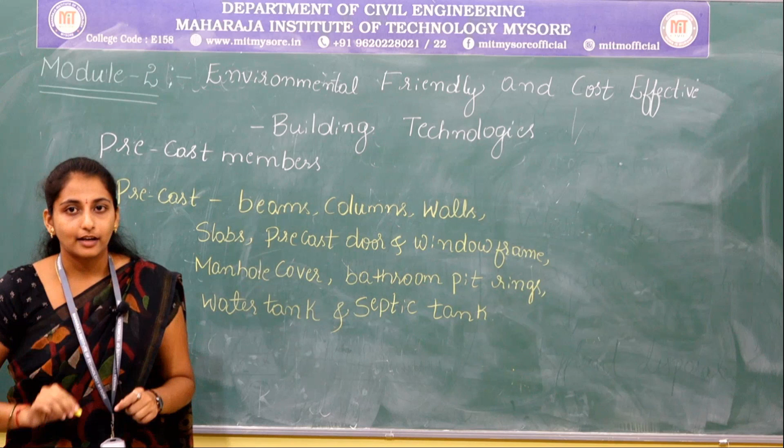In this particular session, I am going to discuss two precast members, that is precast water tank and precast septic tank. First one is precast water tank, and precast septic tank.

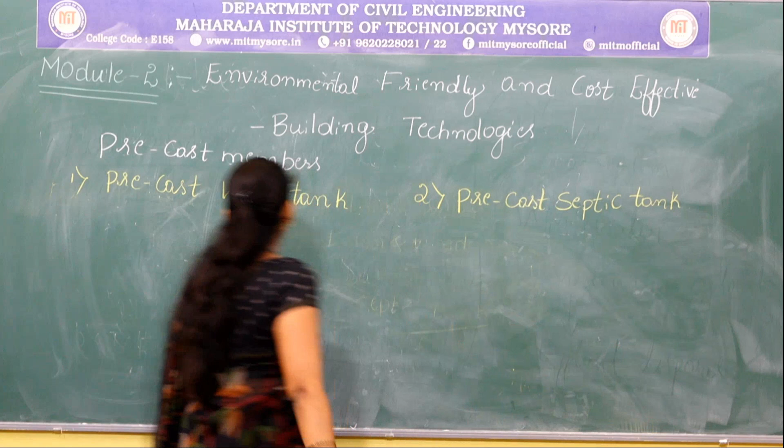Let us see what do you mean by water tank. As we all know, water tank is a container which is used to store water, either for domestic purpose, commercial purpose or for industrial purpose. Depending upon the water demand, we will use different types of water tanks. At present scenario, it is necessary to take measures to store and use water.

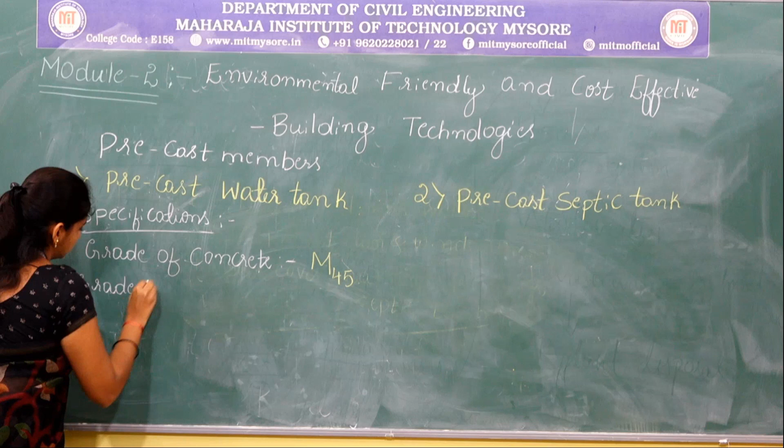Let us see what are all the specifications which are considered while casting the precast water tank. So some of the specifications are grade of concrete - the grade of concrete which is preferred for casting of precast water tank is M45 grade. Then the grade of steel which is used is Fe500 grade steel.

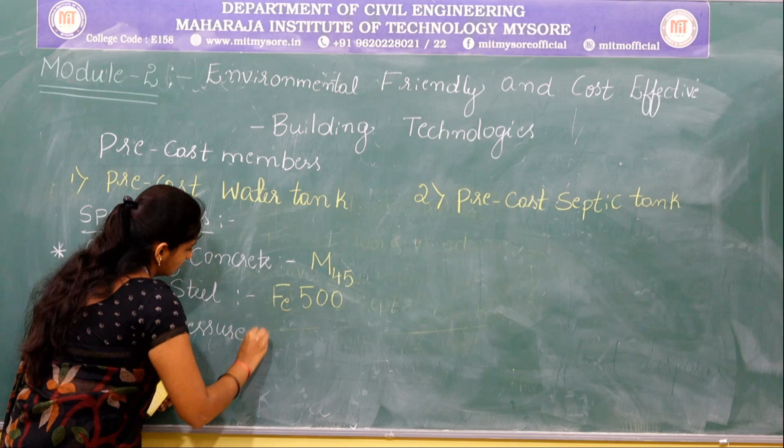Then another specification is earth pressure. So what do you mean by earth pressure? Earth pressure is the pressure which is exerted by the soil, called as earth pressure or lateral earth pressure.

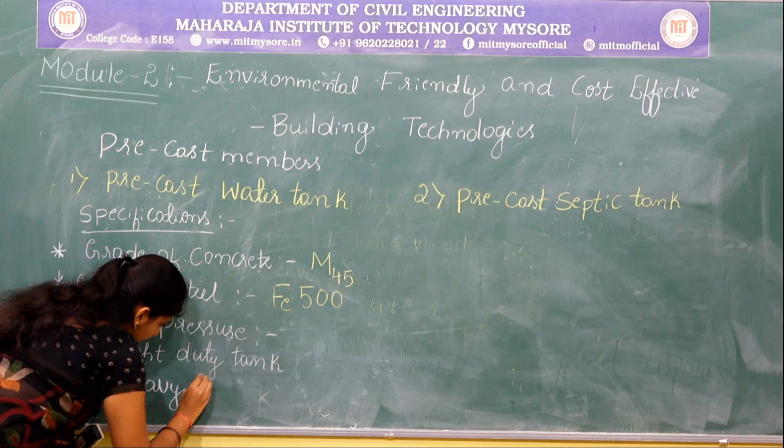Here there are two types of tanks, one is light duty tank, another one is heavy duty tank. The light duty tank is where the quantity of water stored will be less, and it can withstand or take the surcharge load of 1 ton. The surcharge load is the vertical load exerted by the soil, it can take up to 1 ton.

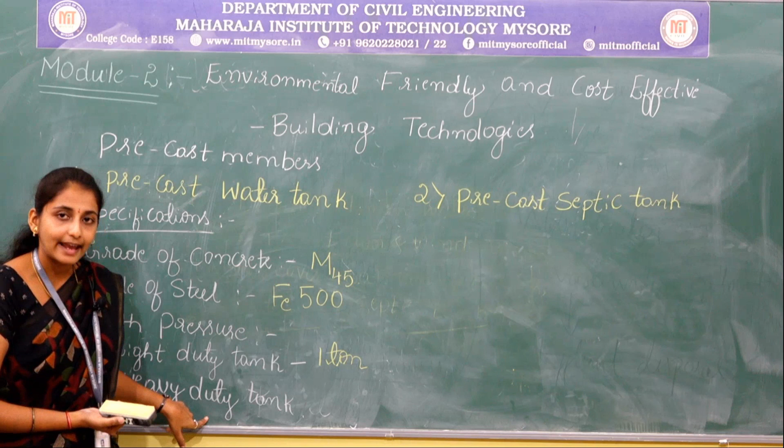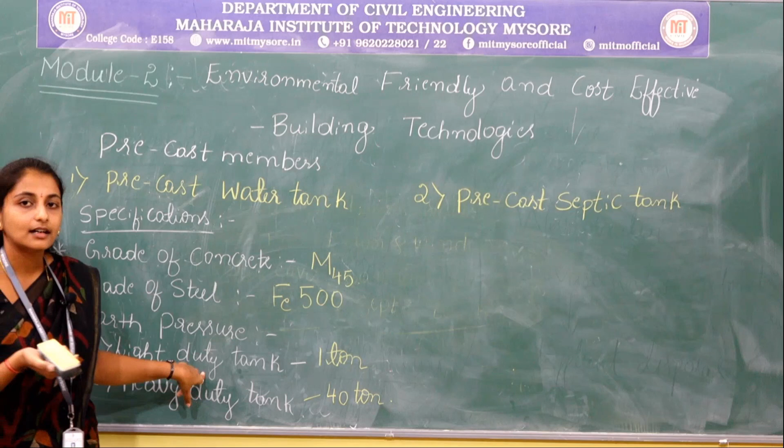The heavy duty tank is where the quantity of water stored will be more, and it can take surcharge load of 40 tons. So the tank will resist the surcharge load which is exerted by the soil, that is 1 ton and 40 tons. So the another specification is uplift.

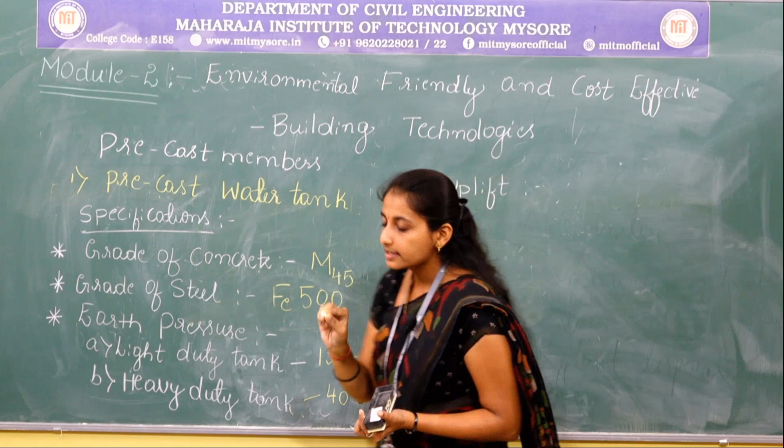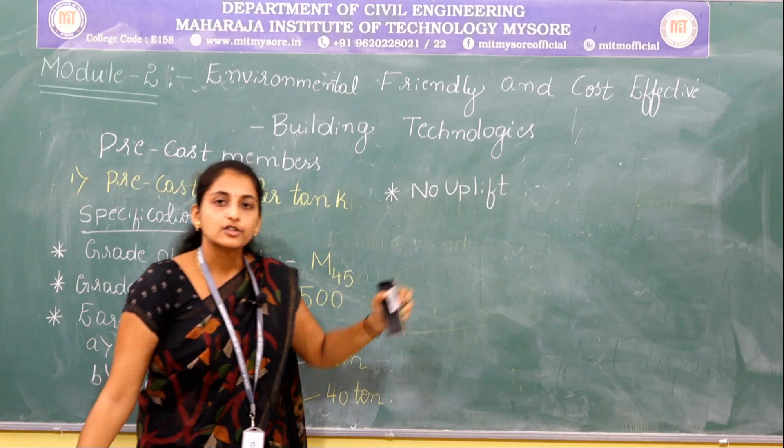Since the precast water tanks are laid in the underground position, we will consider the uplift condition in designing. All precast water tanks are designed for no uplift condition, even when the water tank is fully submerged, fully filled with water, and also even when the water tank is empty. Since it is laid underground, we will not lift the water tank at any circumstances.

Another main specification is the coating of the water tank. The coating of the water tank is necessary in order to avoid the cracking of the concrete and also to avoid the leakage of water. These are the main reasons why we use coating for the concrete water tank. So it is necessary to coat both internal and external of the water tank.

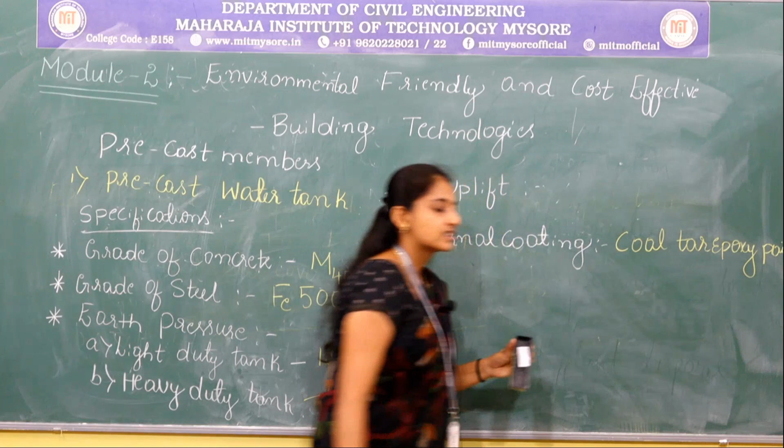External coating is done by using coal tar epoxy paint. We use this coal tar epoxy paint because it has very good resistance in both marine condition and subsoil condition, and it also has very good chemical resistance, good abrasion resistance, and water resistance. So it will avoid the leakage of water.

It will also reduce the corrosion of the steel reinforcement which is provided in the water tanks. Whatever chemical effects are caused to the steel reinforcement, they will be avoided by using this coal tar epoxy paint.

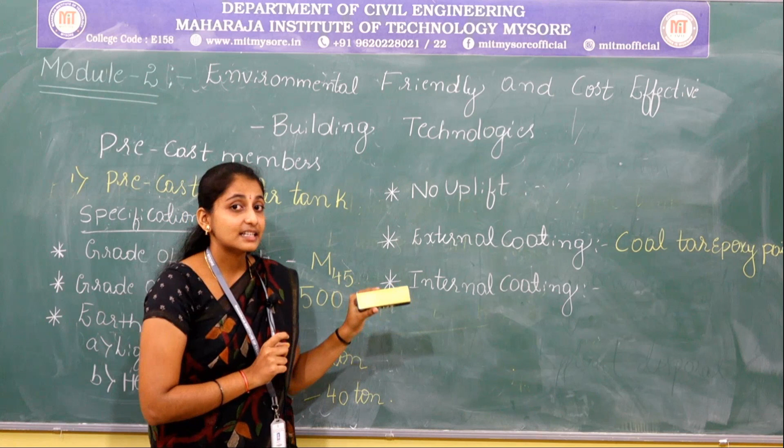The internal coating is done by using waterproofing material. An acrylic cementitious material is used as the waterproofing material for internal coating of the water tank.

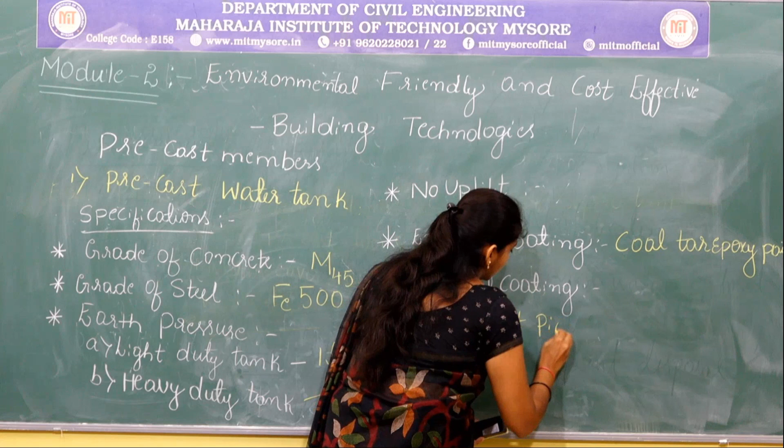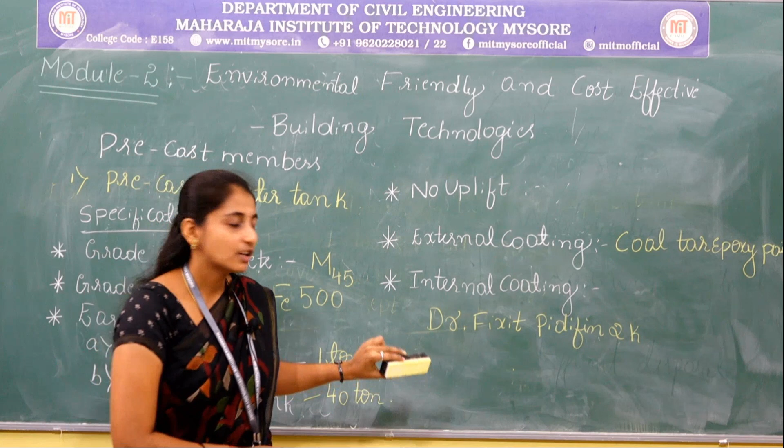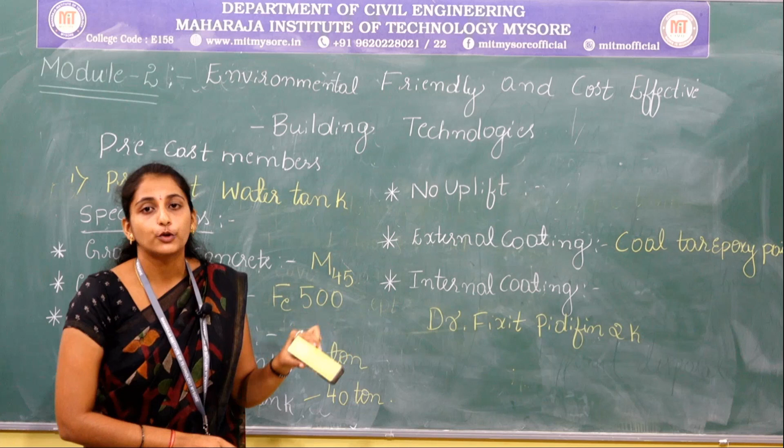One example of this acrylic cementitious material is Dr. Fixit Pidifin 2K. This is one of the cementitious materials used as waterproofing material for internal coating of the water tank. So the main purpose of using coating material in a water tank is to avoid the leakage of water, prevent the water tank from cracking, and prevent it from corrosion.

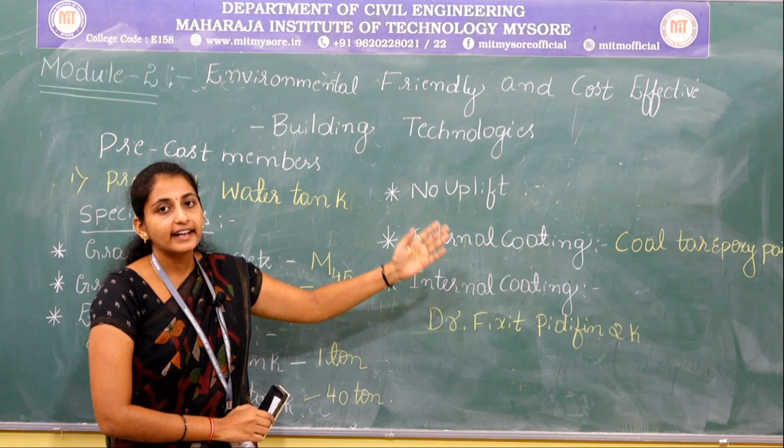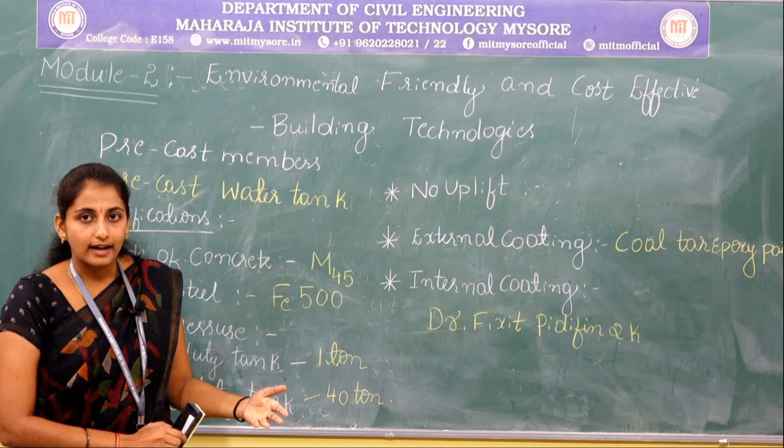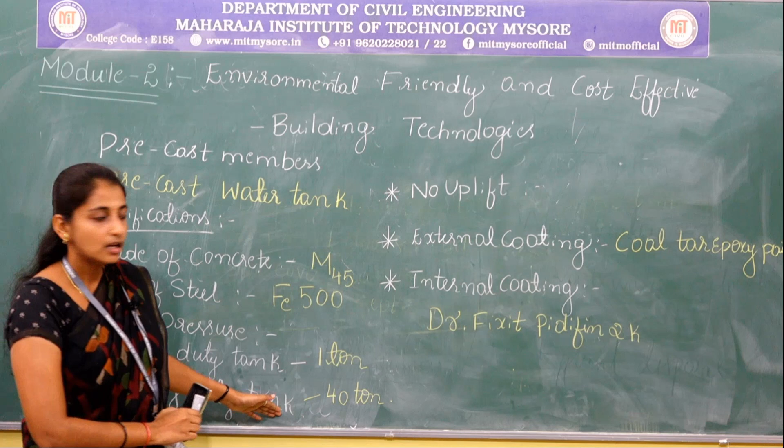This is an example of a concrete rectangular water tank. Different shapes of water tanks are available - we can cast whatever shape we require, rectangular, cylindrical, or others, by using molds. Let us see in the slide, this is an example of a rectangular concrete precast water tank.

It is a good example, where there are plenty of companies whose water tanks are available in the market. The only thing is we will purchase it and install it in our building or construction site. Whatever specifications, sizes and shapes of water tanks we require, we will give the order, purchase it, and then install it directly in our building or construction site.

This is an example of one rectangular precast concrete water tank. It has a weight of 60 kg and a thickness of 2 inches. The dimension of this rectangular concrete water tank will be 4 feet by 2 feet, and it has a storage capacity.

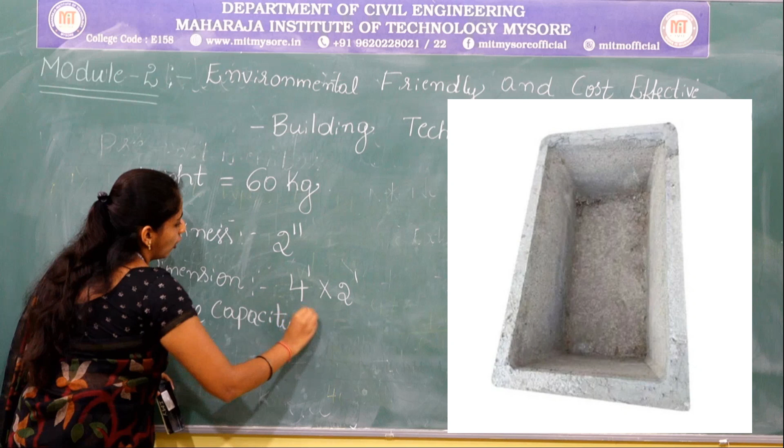The storage capacity of this water tank will be 500 liters. The cost of this water tank will be around 3000 rupees.

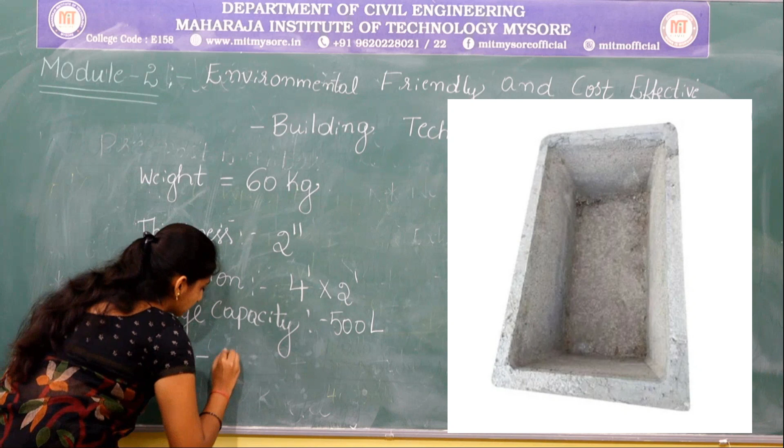The cost of this rectangular precast concrete water tank will be 3000 rupees. So this is about this precast concrete water tank.

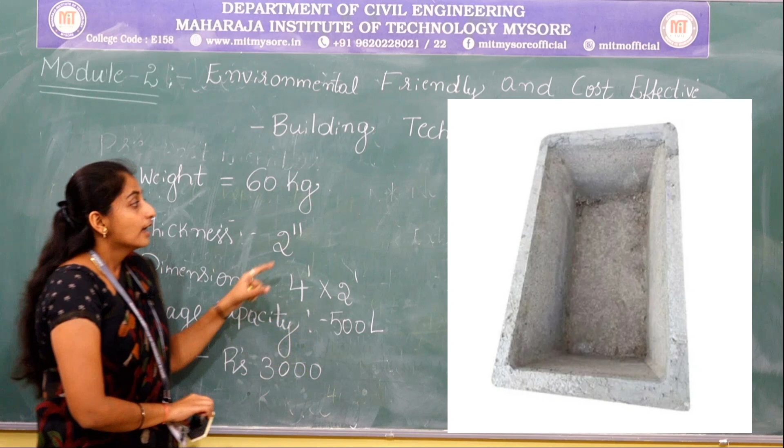We will cast the precast water tank for 500 to 1 lakh storage capacity using molds in a factory. So instead of using brick masonry water tank, we use precast concrete water tank here. These precast concrete water tanks are structurally safer than the brick masonry water tank. We can compare the cost of normal brick masonry concrete tank and this precast water tank. This precast water tank is more durable and more structurally safer than the brick masonry water tank.

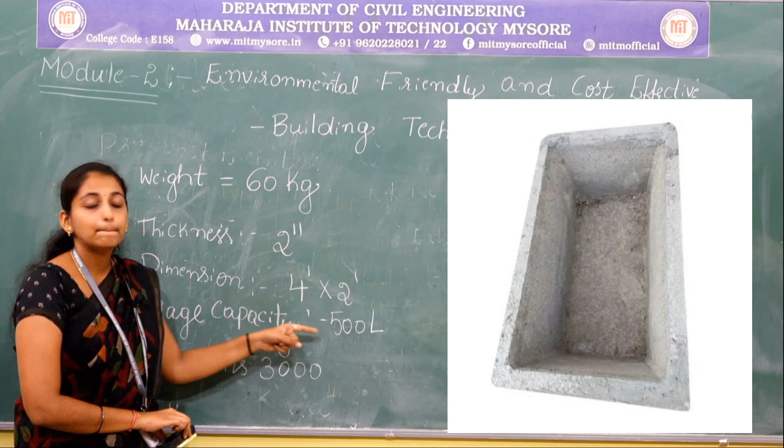Using this water tank, we will directly place it in our exact location, which will reduce the construction time. This is about the precast water tank. So let us come to the another precast member, that is precast septic tank.

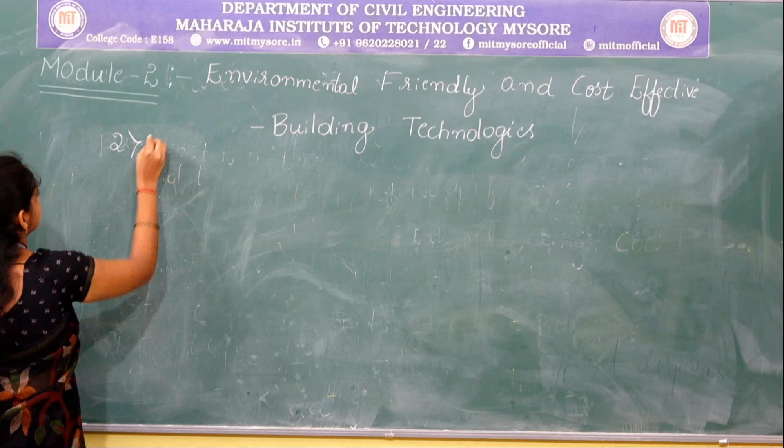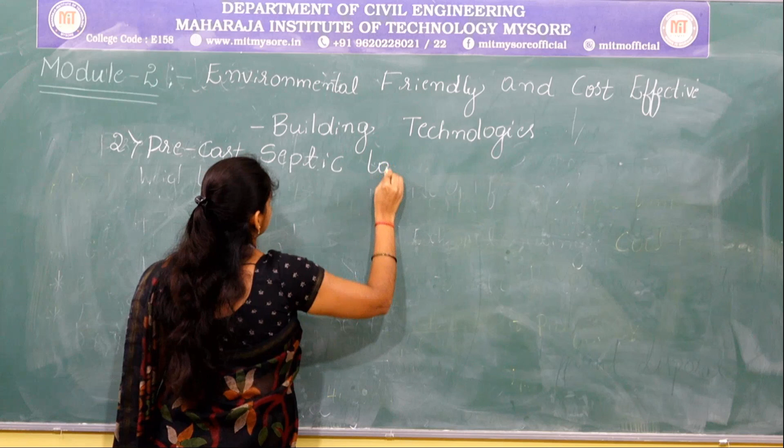So another precast member is precast septic tank. Before going to the precast septic tank, let us see what do you mean by septic tank. Septic tank is an underground chamber made of concrete through which domestic wastewater will flow for basic sewage treatment.

So what are all the waste which will be generated through our buildings? Domestic sanitary wastewater is generated by our bathrooms, kitchens, laundries and wash basins. These are all the sources of domestic sanitary wastewater. These raw domestic sanitary wastewaters are passed into the septic tank for basic sewage treatment.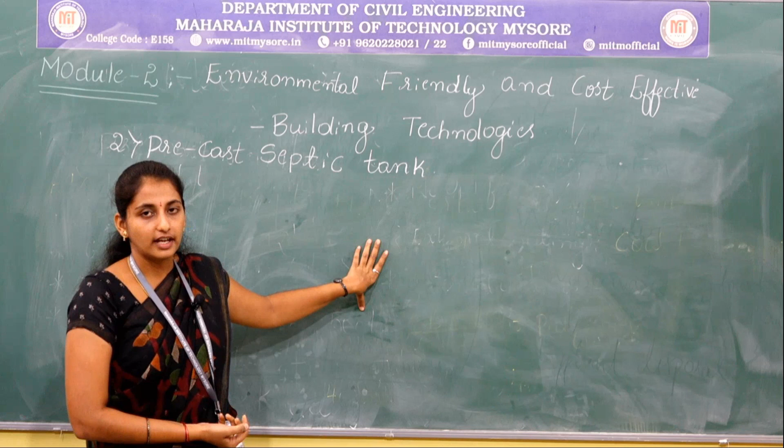By treating this domestic wastewater, it can be used for irrigation or gardening purposes. The main intention of this septic tank is to treat the wastewater in order to minimize the wastage of water.

These septic tanks are watertight tanks and will be buried underground, because they are made up of concrete. So let us see what are all the materials which are required for constructing these precast septic tanks.

The materials required for constructing these septic tanks mainly are steel reinforcement and concrete. So what is the grade or type of concrete used in casting precast septic tank? That is concrete.

The grade of concrete we are using here should not be less than M20 grade.

Based on the codal provisions and highest standards, the minimum cement content based on IS standards will be 400 kg per meter cube.

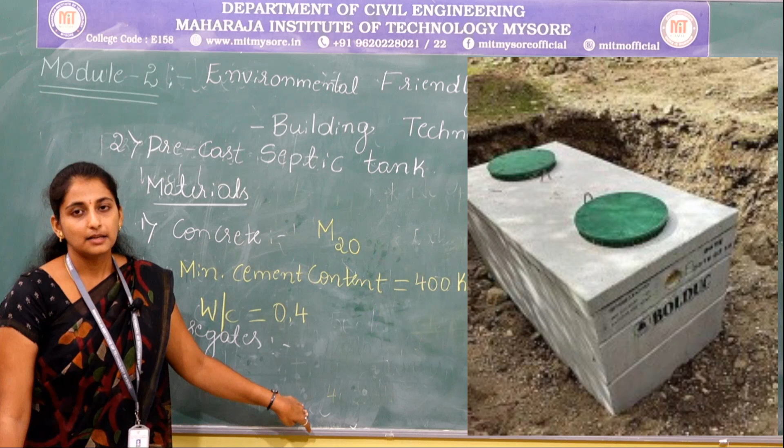The aggregates used in casting the precast water tank - the maximum nominal size of the coarse aggregate should be 12.5 mm. The coarse aggregates we use should not be more than 12.5 mm, it should be 12.5 mm.

The fine aggregate used in concrete should be natural river sand or M sand. The natural river sand used here should be passing through a 4.75 mm IS sieve. So the fine aggregate used for preparing the concrete mix should be passing through a 4.75 mm IS sieve. This is about the aggregates.

Then another material we use is water.

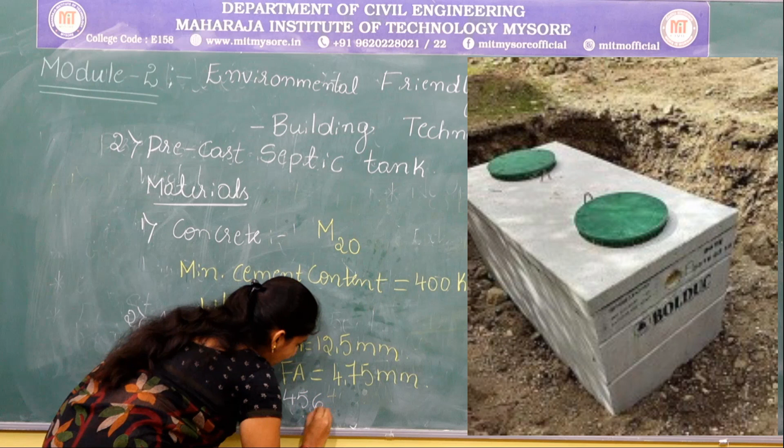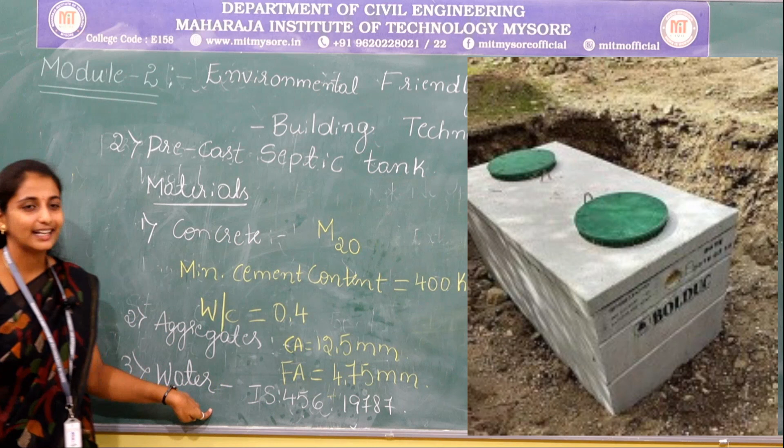The water which we use should follow or fulfill the IS standards of IS 456 and 19787. So the water used for preparing a concrete mix should fulfill this code requirement. That means the potable water which we use for casting the concrete member.

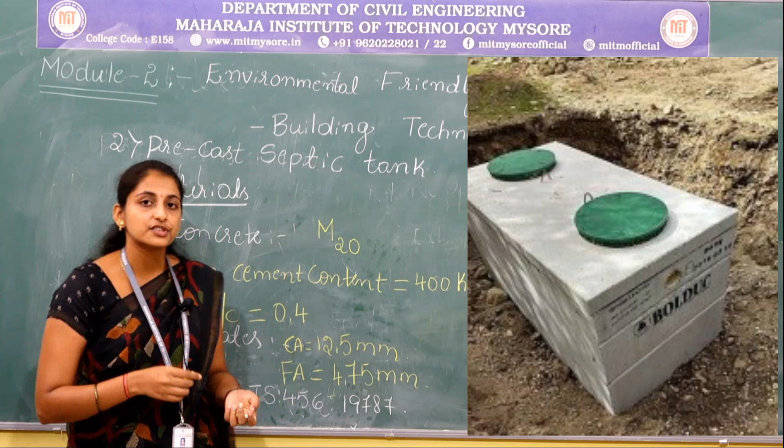So the other material which we use is pozzolanic material. Pozzolanic materials used in concrete, the main intention of using pozzolanic materials in concrete is in order to reduce the cement content in a concrete. By using pozzolanic materials, they will have the same qualities of the cement. Whatever characteristics cement has, it should also possess the same characteristics.

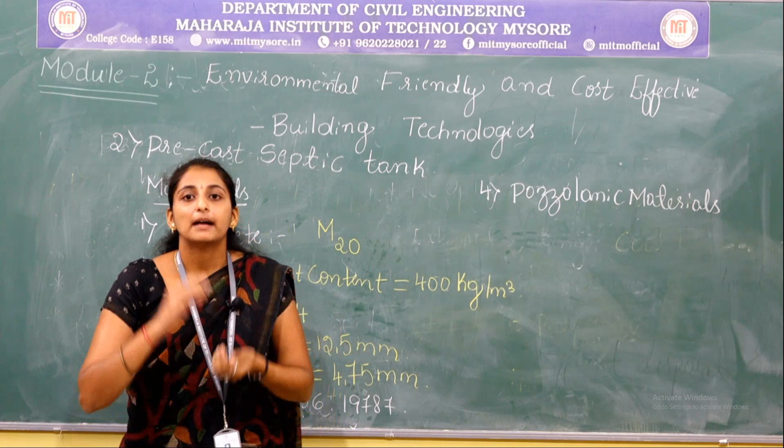Let us see some of the pozzolanic materials used in casting a concrete as partial replacement of cement. The main intention is to reduce the cement content by partial replacement of cement. Some of the pozzolanic materials used in concrete mix are silica fume, rice husk ash, GGBS, fly ash. GGBS is nothing but ground granulated blast furnace slag.

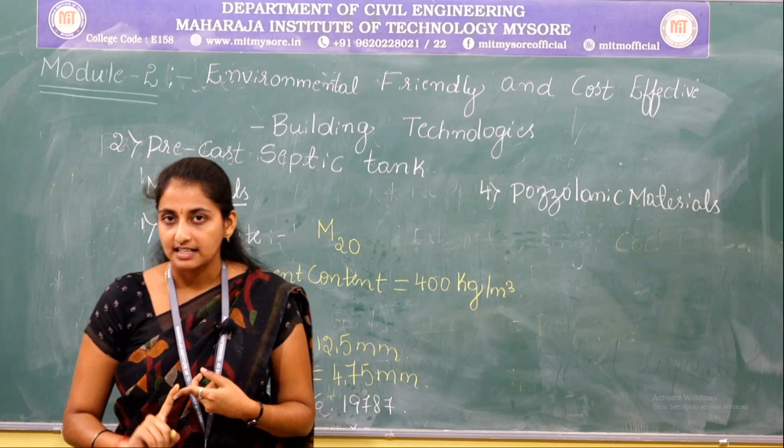So some of the pozzolanic materials are fly ash, silica fume, rice husk ash (RHA is nothing but rice husk ash), GGBS which is ground granulated blast furnace slag, and also metakaolin. These are some of the pozzolanic materials used in partial replacement of cement in order to reduce the cement content, in order to reduce the cost of cement in the concrete mix while preparing it.

Since it has silica content in it, it will possess the same qualities, same properties as the cement. Then based on the IS code standards, we will use these materials as the partial replacement of cement while preparing a concrete mix.

So the next material which we use is admixtures. There are two types of admixtures: one is mineral admixture, which I already mentioned relates to pozzolanic materials as well. The chemical admixture used in concrete is superplasticizer. We use superplasticizer in order to improve the workability of the concrete by reducing the water content.

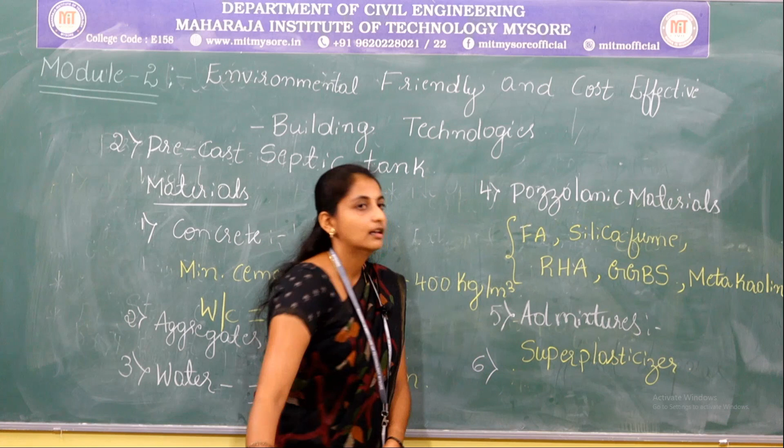So the main material used in concrete design mix is reinforcement. After cement, reinforcement is the main thing in concrete mix. We use reinforcement in order to strengthen the concrete. As we all know, concrete is good in compression but weak in tension. In order to improve the tension property of the concrete, we use steel reinforcement.

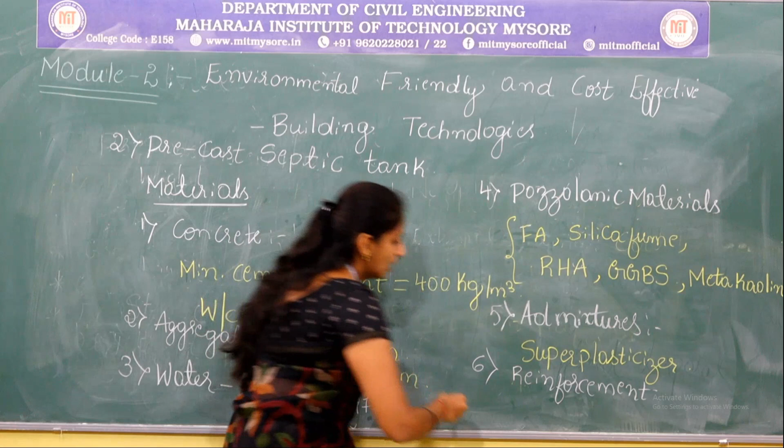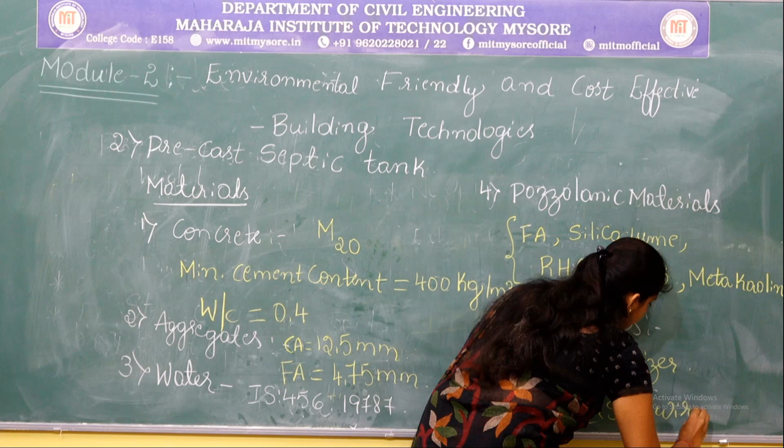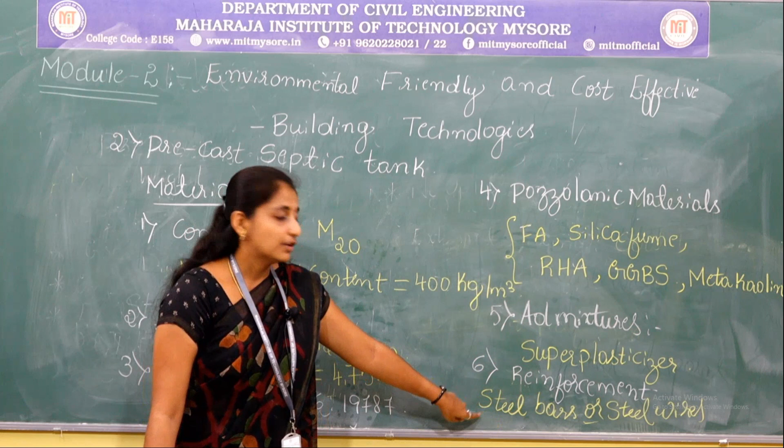In order to improve the tensile property of the concrete, we use steel reinforcement in a concrete mix. So in septic tank construction, precast septic tank construction, we will use steel bars or steel wires as reinforcement. So these are some of the materials we mainly concentrate on while preparing a precast septic tank.

So let us come to the working principle of the septic tank.

Mainly these septic tanks are installed in institutional buildings, that means schools, colleges, hostels, hospitals, apartments, and also malls. So these septic tanks are mainly installed in these buildings, where the generation of domestic waste or sanitary wastewater will be more. The quantity of domestic sanitary wastewater generation will be more. In those places we will install the septic tank in order to give basic treatment to that domestic water.

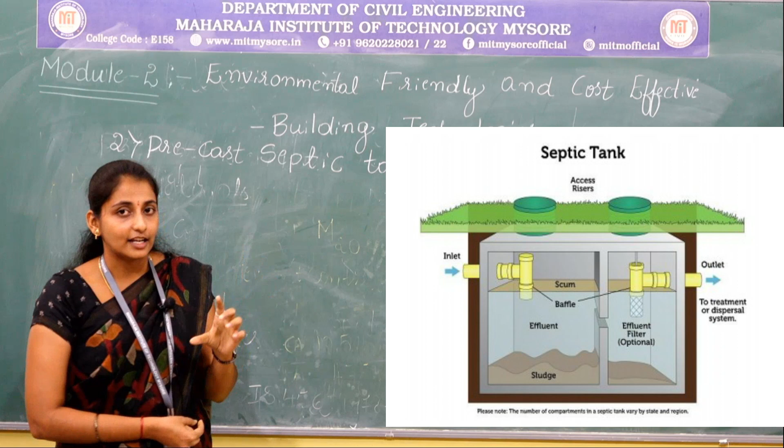These septic tanks are also installed in some buildings and also some villas, where the main intention is to treat the wastewater. So let us observe the slide. The septic tank consists of an inlet, two chambers, a baffle, and also an outlet.

So what are all the wastes generated in your buildings, any type of building, that waste will be passed through a pipeline to the septic tank through the inlet. So whatever waste is collected or outletted from your buildings will enter your septic tank through the inlet pipe. So through the inlet pipe the domestic wastewater, domestic sanitary wastewater, will enter your septic tank.

In the septic tank the wastewater will be segregated into 3 layers: scum, effluent, and sludge. So whatever domestic wastewater enters your septic tank will be segregated into these 3 layers, where the top layer is called scum, then effluent, and also sludge.

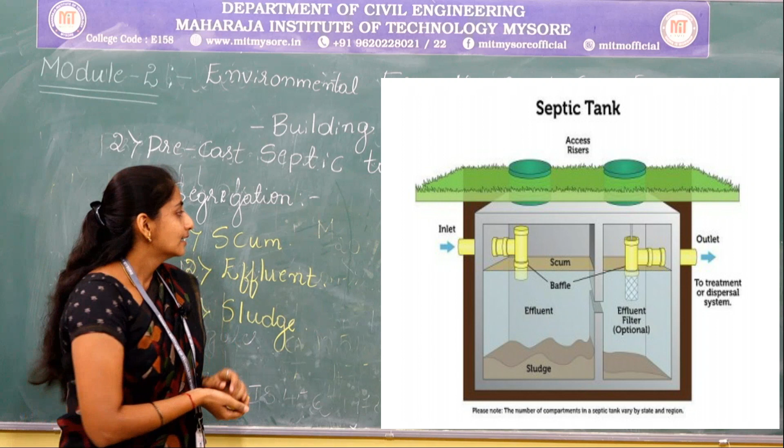So what does the waste contain? The wastewater usually contains both solid heavier particles and lighter particles. The lighter solids, that means the oil and grease, float at the top of the chamber, first chamber or second chamber. The number of chambers mainly depends on the region and the amount of waste generated, based on which we place the chambers.

So the lighter particles present in your wastewater float at the top of the chamber, and that is called scum. What are all the liquid waste present in your septic tank are called effluent.

Then, after the lighter particles float, the heavier solids get settled at the bottom of the tank. Heavier solids settle or accumulate at the bottom of the chamber, and that is called sludge. So whenever domestic sanitary waste enters your septic tank, it gets segregated into 3 layers: scum, effluent, and sludge. What are all the heavier solids that settle at the bottom of the tank is called sludge, due to the naturally present microbes in your septic tank.

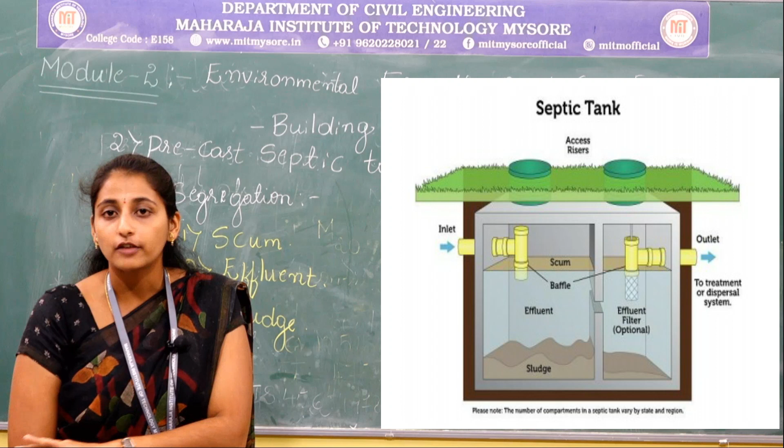In this session I will discuss the two main precast members: precast water tank and precast septic tank. The main intention of using these precast members is to reduce construction time, by using these precast members the construction time is reduced through rapid fastening of the work.

Whenever we have a specified time for completing a project or building, we go for these precast members. These precast members are also more durable than conventional members cast exactly at the site.

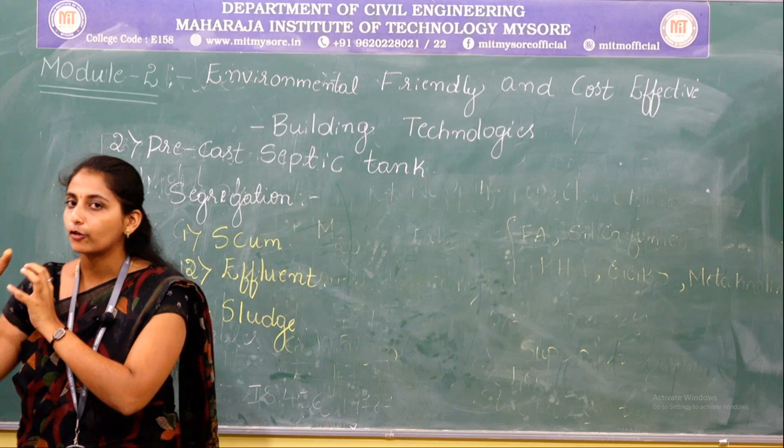Rather than constructing exactly at the site, we use these type of materials for cost effectiveness. These precast members, both septic tank and water tank, are available in markets in whatever sizes and shapes required for our construction site. We directly give an order, purchase it, and it is shifted to the exact location of the site, where we erect it in the exact position.

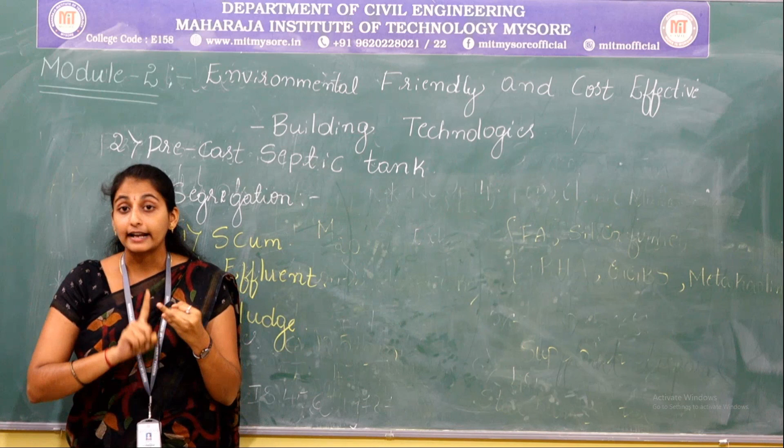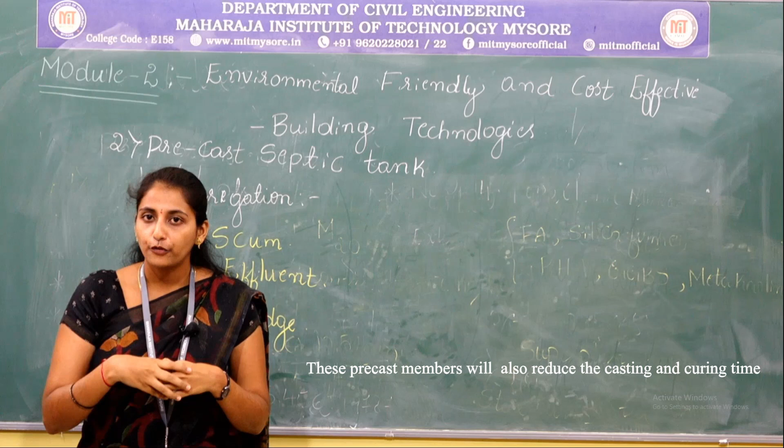By this process, it reduces labor cost, material cost, and construction cost. These members are more durable than conventional materials since they are cast in a controlled condition at factories.

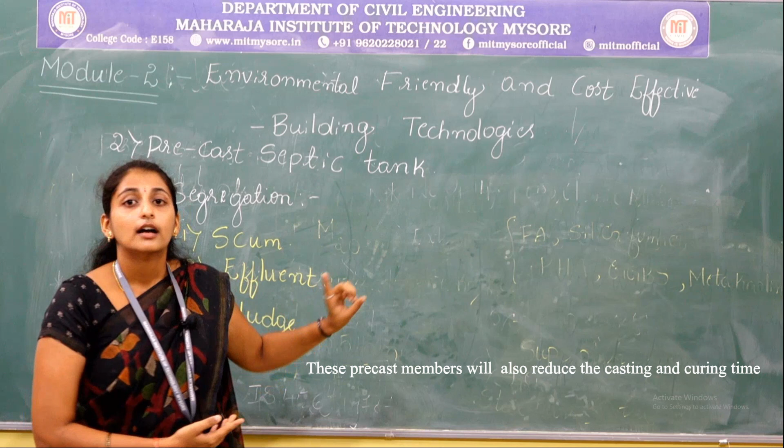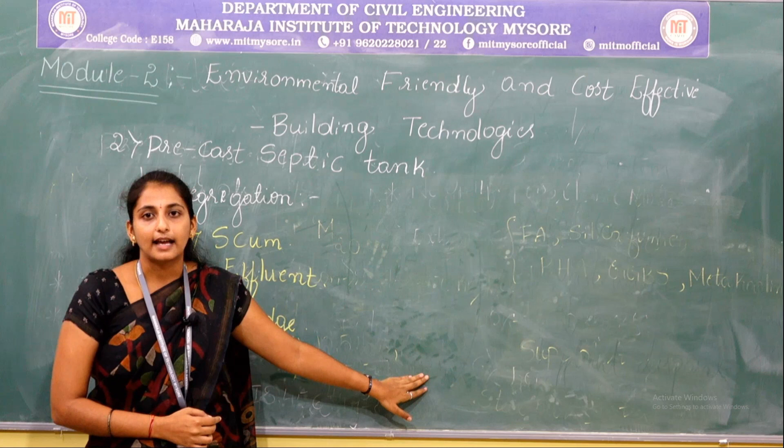So the main intention is to reduce the cost of construction, so that within a specified time we complete the project. This is why we are using precast members in cost effective building construction.